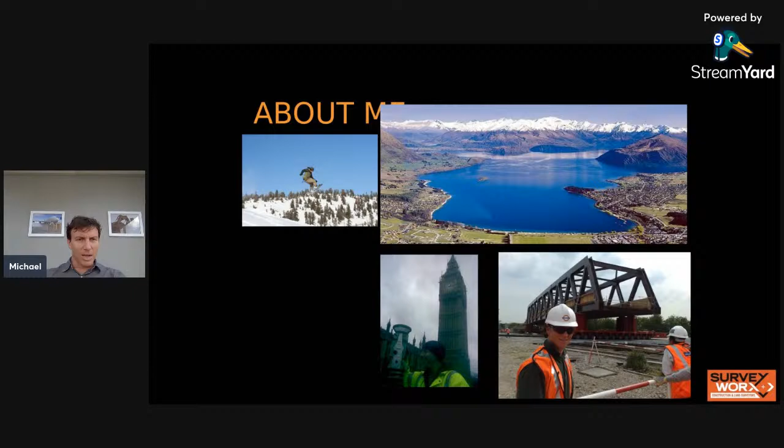So the Waterview Tunnel was the last piece of the puzzle to this Western Ring Route - it used to roll off the tongue.

Excuse me a second. I'll get my notes up to speed.

And so yeah, it was $1.4 billion. The City Rail Link project now overshadows that. 4.4 billion was the last estimate for the City Rail Link. So it seems to be the factor that these projects go up in, about 4 times.

So yeah, at the same time, around the northern end of our project, there was the causeway going on and the St. Luke's widening as well. So all these projects working together to create this new alternative to the Harbour Bridge and State Highway 1.

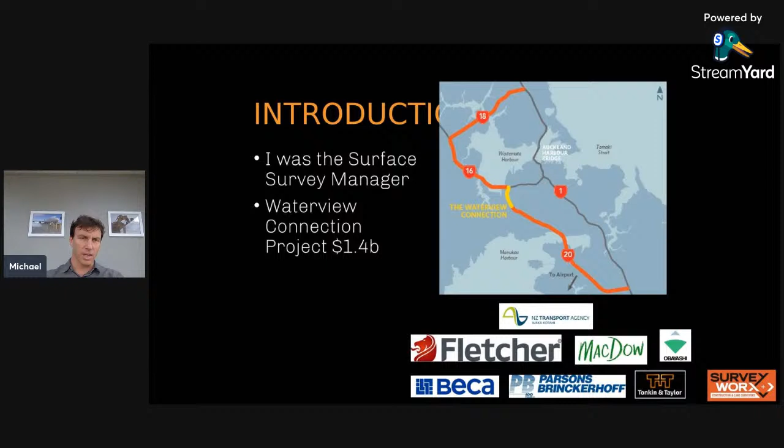So it is 5 kilometres of 6-lane motorway, so 2 tunnels, 2.4 kilometres long, and a 14.4 metre diameter TBM. So that was the 10th largest in the world, the largest in the Southern Hemisphere at the time. Since then, I'm not sure, the City Rail Link doesn't quite have those kind of stats, but 14.4 metres is quite massive.

800,000 cubic metres of spoil came out of both those 2 tunnels, and there's 4 new interchange ramps at the northern end there, and those ramps in themselves were a project each. 55 columns, 48 crossheads, 7 abutments, 260 super T beams. So yeah, rather large.

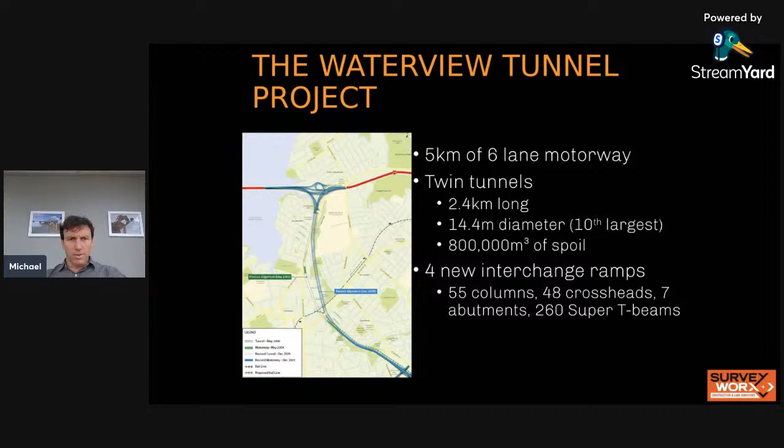So first, I'm just gonna go over the spoil disposal site. Like I say, this is my slideshow from 8 years ago, but I've added this picture to the right. I hope you can make it out. If you look at the top right of the picture on the left, you can see the Auckland Transport Rail Depot building there. If you look on the picture on the right, you can see it in the right corner there too. So the picture on the right is obviously the top down. Picture on the left is a little bit of an oblique view.

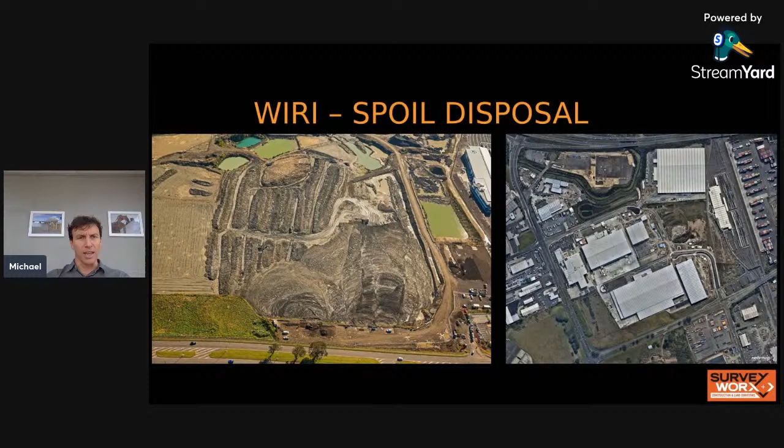So you can see where all the 800,000 cubic metres of spoil went. It was all dumped off at the bottom of the screen there, and you can see it getting pushed out. And what they did was they put it into what they called windrows, to dry out this spoil so it could then be compacted, and that land turned into productive land. So that was Old Wiri Quarry. As you can see there on the left, it's all getting reclaimed with our spoil, and on the right, that is an aerial of today. So good to see that land become productive.

Then there was the precast yard. This is where they made all the segments. Unfortunately, my notes are working quite slowly.

Let's see. I didn't have the number of segments they made, but if you can do the maths, there was 10 segments per ring, and each ring was 2 metres long, and in total there's about 5 kilometres of tunnel. So yeah, a lot of concrete segments. If you look at the road there, you can see a car down there at the bottom left. Kind of gives you a scale, and what's being produced there is only a fraction of the amount of ring segments that was needed to line the 2 Waterview tunnels.

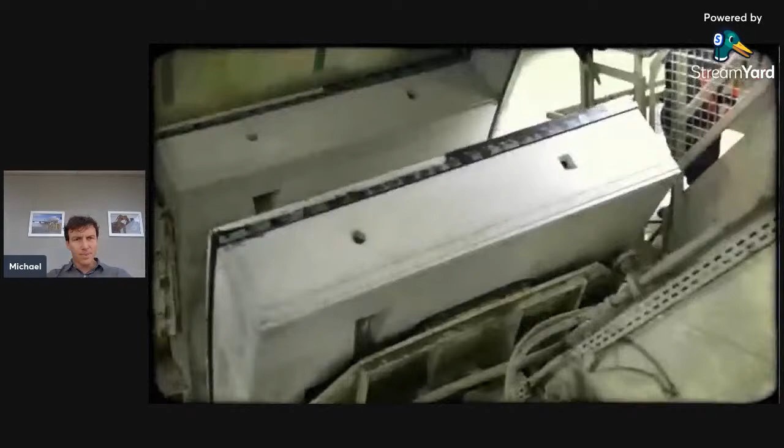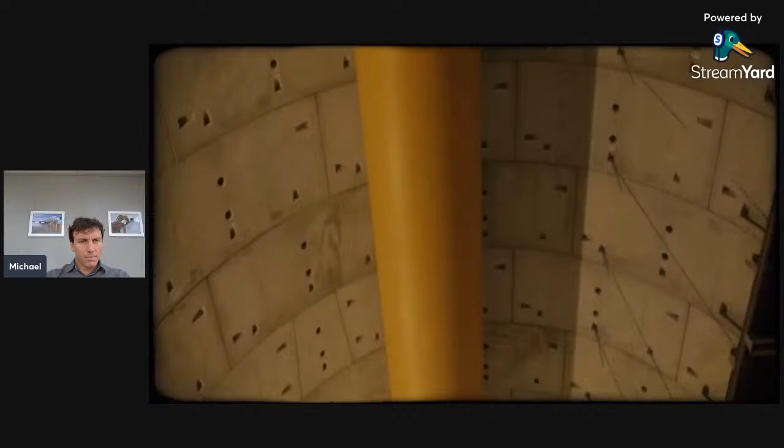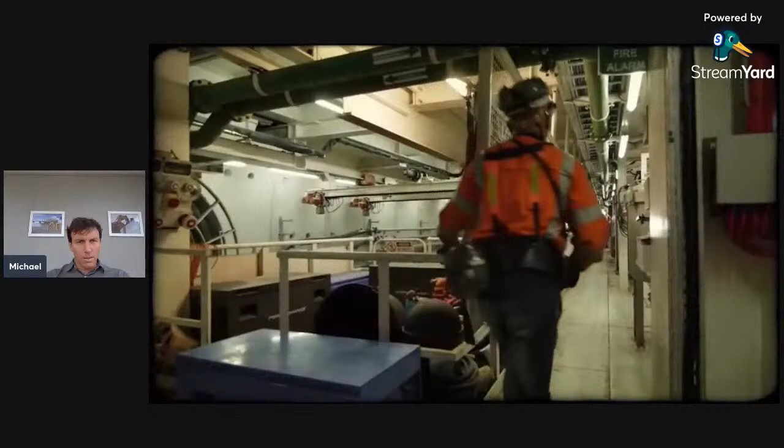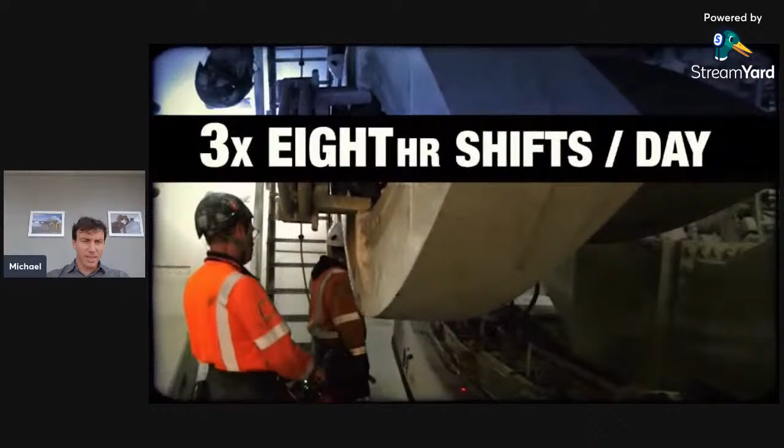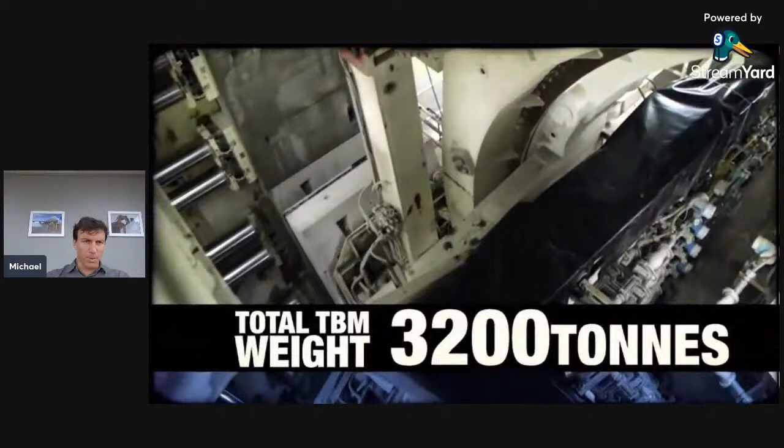This shows you how the tunnel was built. This was the boring machine. So you see there the concrete ring segments getting lifted into place, picked up by suction cups basically, with vacuum. That crane lifts them up and puts them into place. They get put in place on what they call the shield, at the end of the cutting face of the TBM.

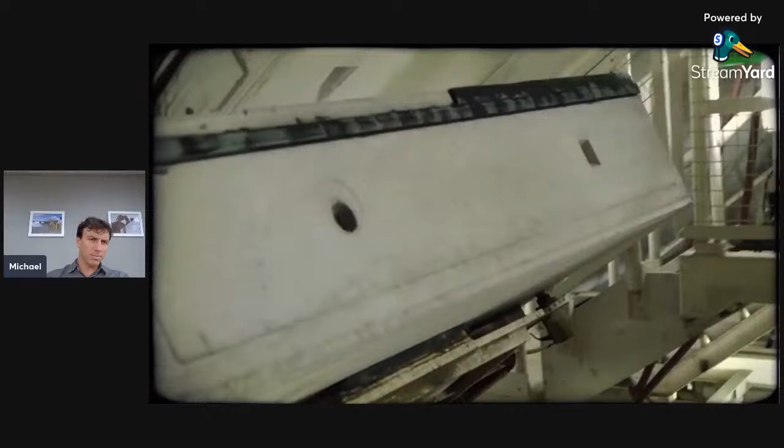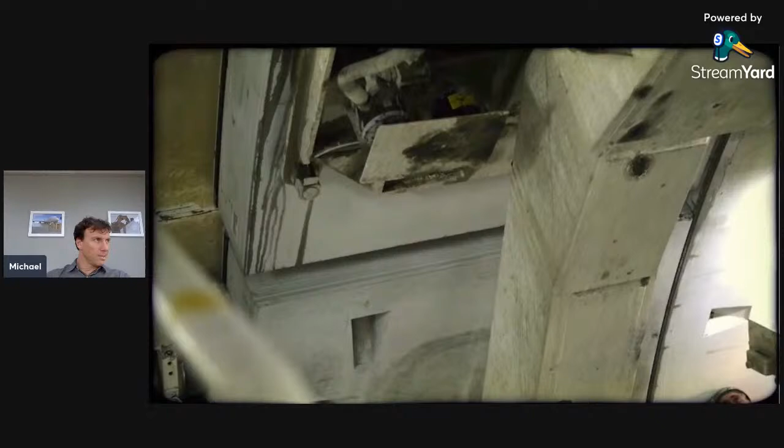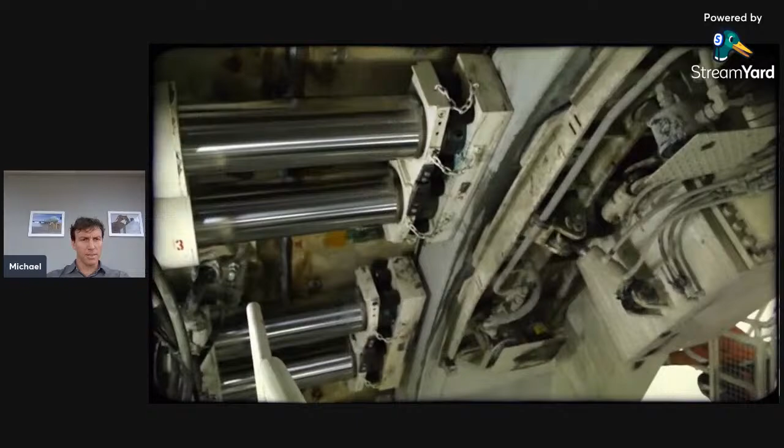That shield moves along, and then those segments go directly onto the ground, to the wall of the tunnel. And then grout is filled in behind, stabilising them. So you see the jacks pushing the segments into place.

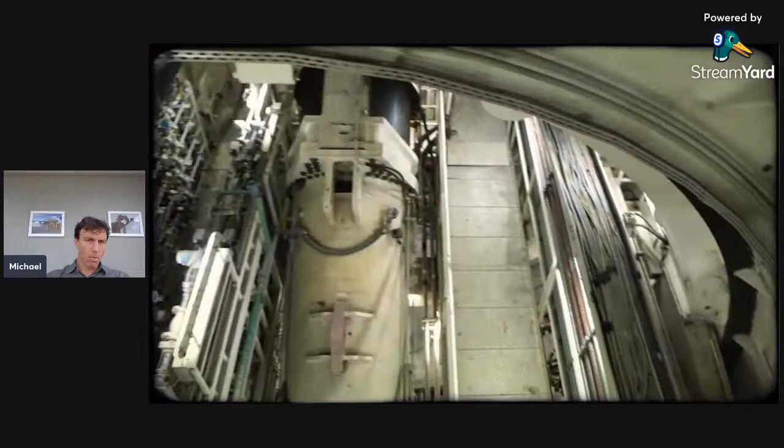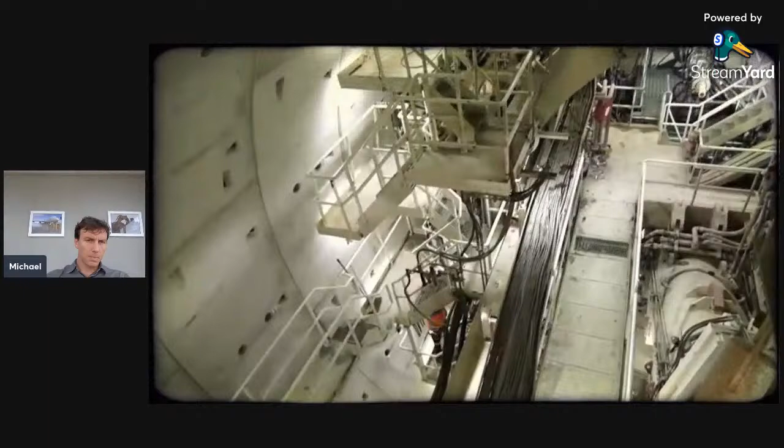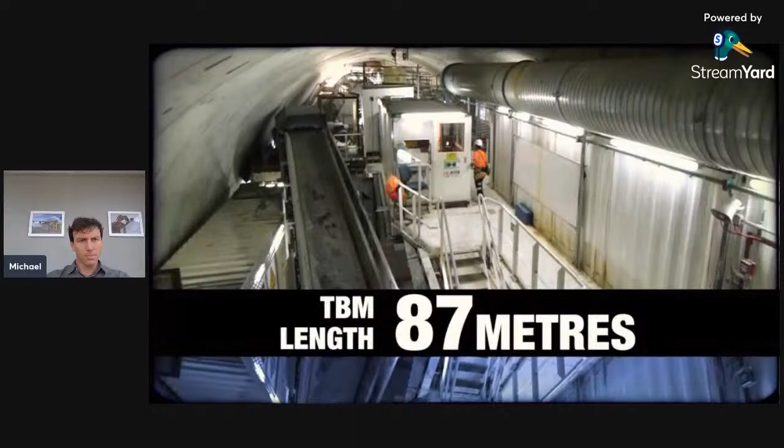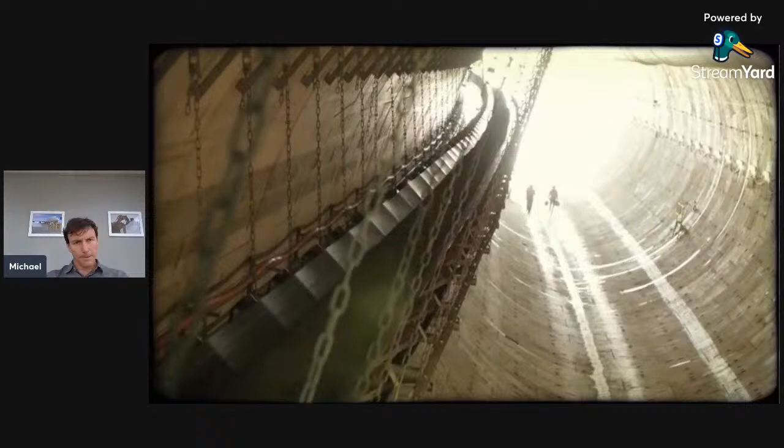That's the spoil going along the conveyor belt, coming out back. That's the driver of the TBM, the big steering wheel, just a bunch of knobs. The air vent, fresh air in.

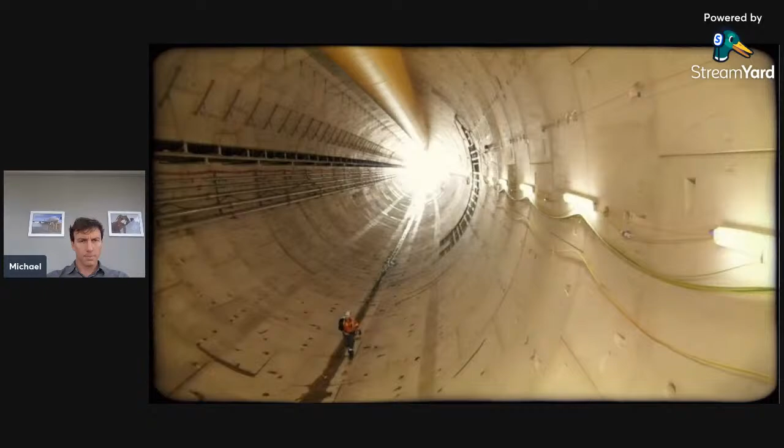So I hope you could hear me over that video. If not, you get the idea. Alice was the name of the tunnel boring machine. There was a competition amongst all the schools to come up with a good name, and some boy from one of the local schools thought of Alice from Alice in Wonderland. And it's tradition to give the tunnel boring machines a girl's name.

I think that's all based off of Santa Barbara, and yeah, if you look that up, you can find out all you need to know about that. But they often have the monument of Santa Barbara at the entrance for the tunnels for good luck and superstition or religious beliefs, depending on your point of view there.

So the surface survey, I was manager of the surface survey team, and there was a north team and a south team and a monitoring team as part of that. And there was also a tunnel survey manager as well. So I didn't have so much to do with the tunnel itself, but overall there were 21 surveyors at its peak, and a lot of that was because there's a lot of shift work, so we needed at least 2 or 3 surveyors per shift, and there were 3 shifts of 8 hours.

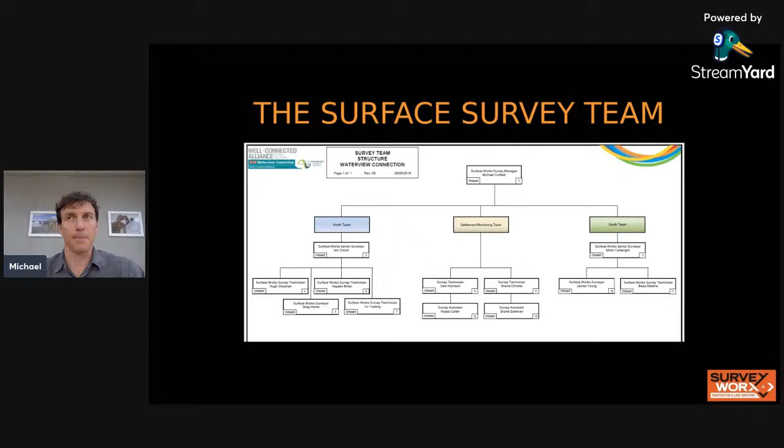So the equipment we used, as you can see the list there, we had quite a few total stations. At that point, the new Faro S120, I think it was called, came into production, and I was pretty keen to get my hands on one. Trimble also got that same thing and called it a TX5. So we were able to use that a fair bit.

We had a bit of machine control on the project, a few diggers hooked up to Trimble machine control systems, and yeah, a lot of GPS units as well, a lot of rovers, as well as all the digital levels to do the monitoring. And we had a bit of a quiver of digital levels. We had a Trimble one for the rainy days. It had the higher IP rating.

And then we had a Sokkia, which we spent a bit of money on, but was literally magic. It could read the barcodes on the staves from literally around corners, and we couldn't quite figure out how it worked. We did so many tests on it, but yeah, it could read the bar code in very strained conditions. Plus, it had the autofocus, so it just sped up everything out of sight.

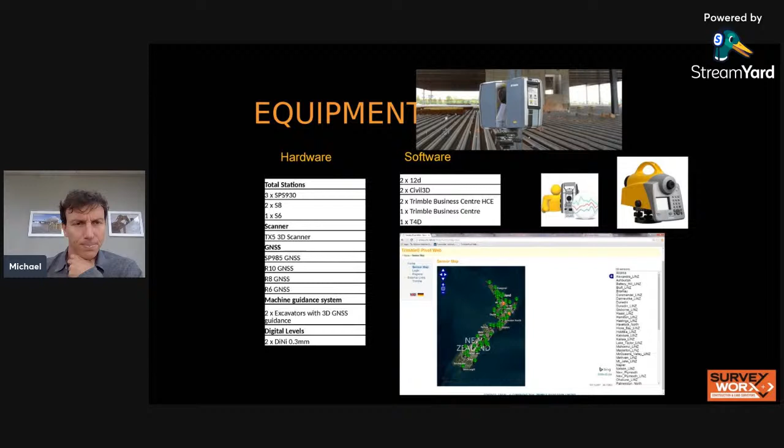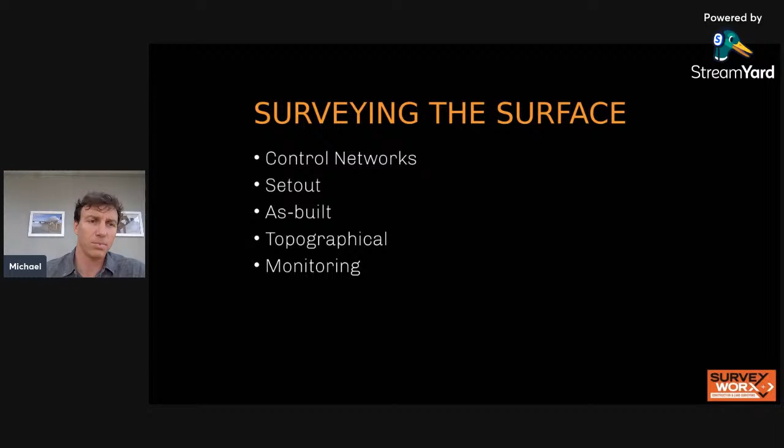So surveying the surface involves setting up a control network, set out, as-built, topo surveys, and monitoring. So I'm just going to go over each of those. So control. On that project, it was a bit of a mix. We got people in to do the control for us at the start.

I learnt a lot about that, and from this project onwards, we made sure we did all our own control, because we had various people from various companies coming in and doing it in various different ways, and we lost all control of the control. So we could put our own control off what they'd provided, but these other people that would come in, we'd sometimes disagree with their methods, and yeah, doing your own survey control is quite important to your satisfaction on the job.

So fast forwarding to City Rail Link, we did it all ourselves, and we kind of over-engineered it, but we were so comfortable and confident on that project, and still are with Sam, who's taken over there. But yes, we used Trimble Business Centre mostly when we were doing our own control on this project.

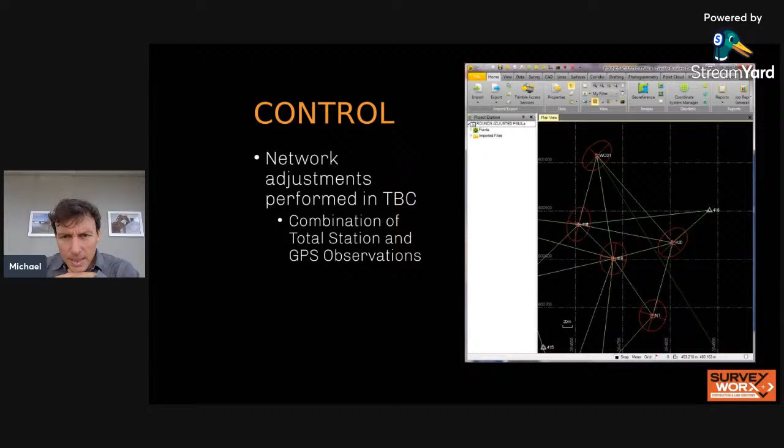So, set out. As mentioned, we had a couple of machine-controlled excavators on site. So that's part of set out, right? Because we have to create these models which can be used by either the total station or the machine control equipment, or the GPS equipment, or maybe even by engineers sitting behind a desk. So to me it all forms part of set out, as part of the data management as well. So in this case, for machine control, we're having to create these 3D models for the excavators to cut to.

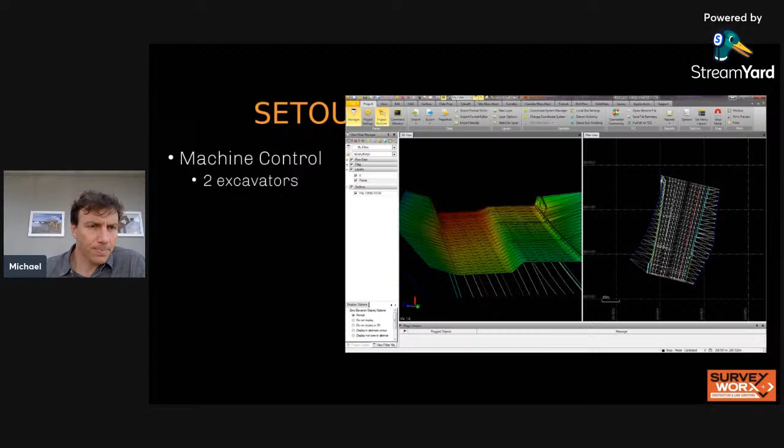So on this particular bridge, this was where we really had to think about our scale factor, because that suspension part there, it's a combination of suspension and column. That suspension part was prefabricated off-site and was 130 meters long from memory. So we had to make sure that those ends were going to fit perfectly to the suspension truss that was going to come along. So we removed the scale factor on that particular part of the project. Otherwise, we left the whole project in Mount Eden 2000.

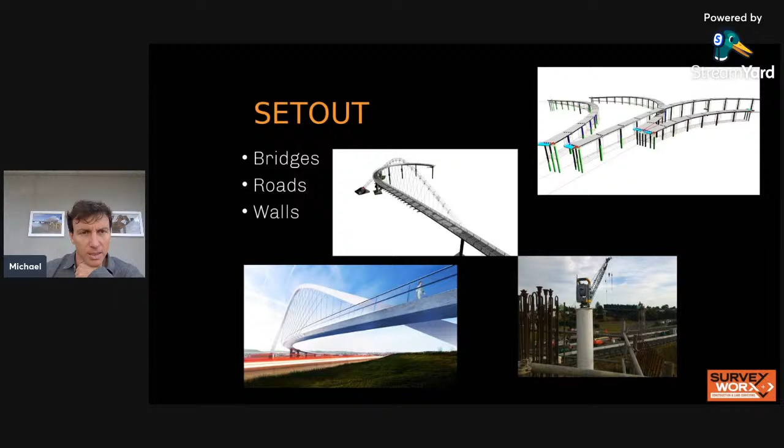But otherwise, you can see the bottom right there. That's a total station setup for doing some of the set out for some of these on-ramps and off-ramps.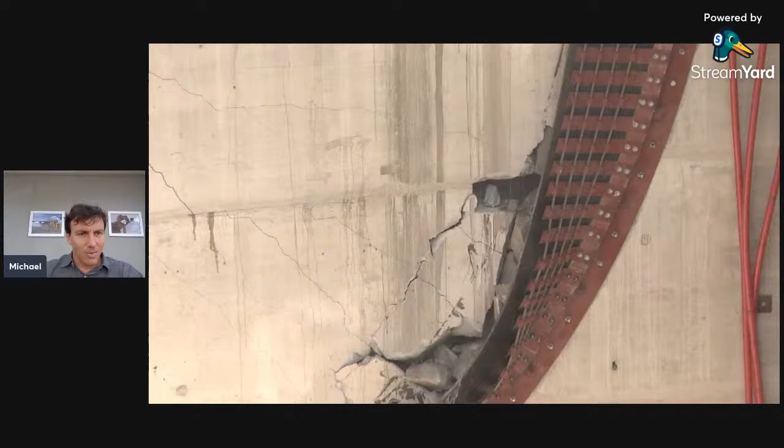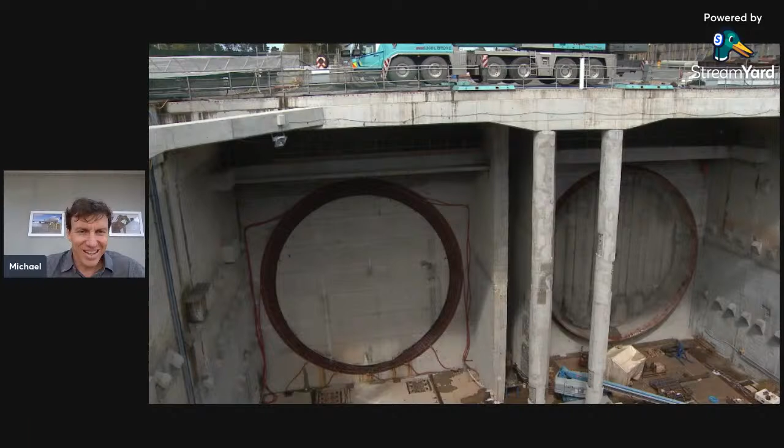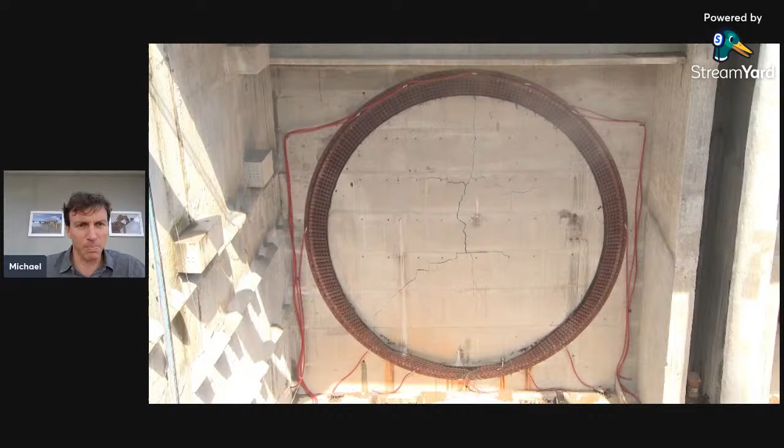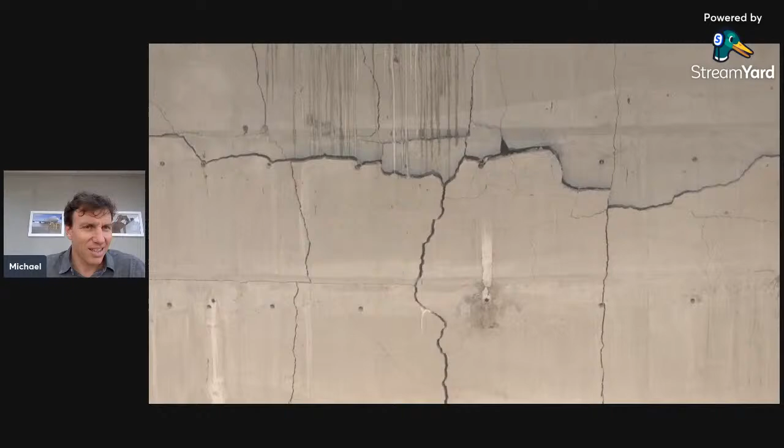Okay. So this is the breakthrough of the TBM. This is a little private one that only a few of us got to see. Politicians got to see the final one, and everyone got to see that. This is the first one. We're all confident but nervous. First big thing like this in New Zealand, and the sound is impressive. It's like a wail. And then you realise it's more like fingernails on a chalkboard. It's metal on concrete. And 14.5 meters of concrete coming down. It was quite a moment.

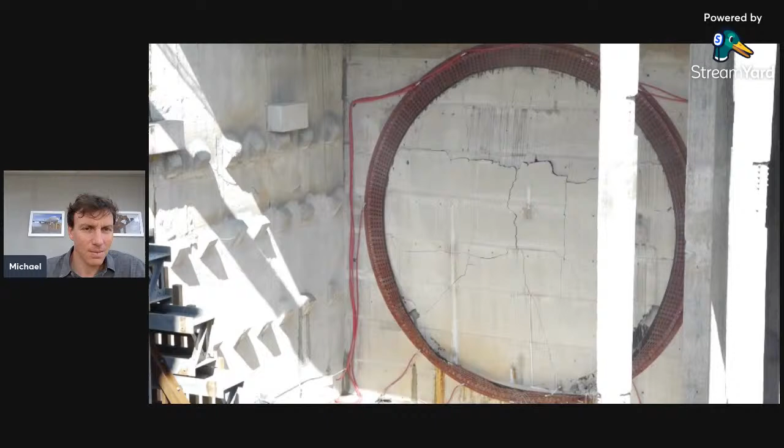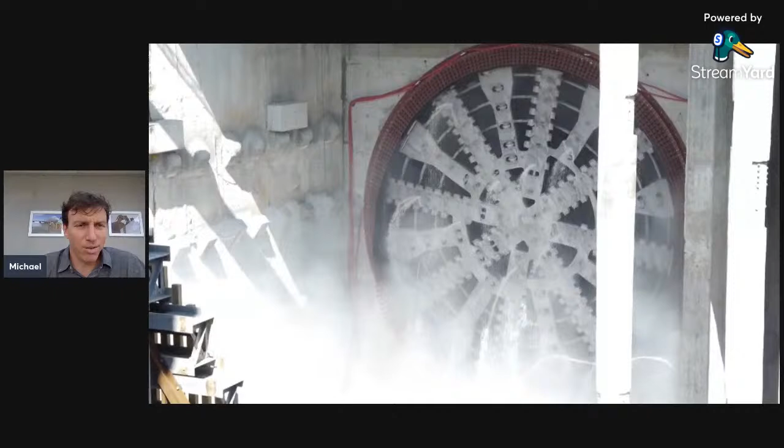I've seen a few other videos of breakthroughs, and I have to say that this one seems the more spectacular. They all come through in different ways depending on what kind of concrete they put in. But for our one, there was no reinforcing at all, so it all just came together.

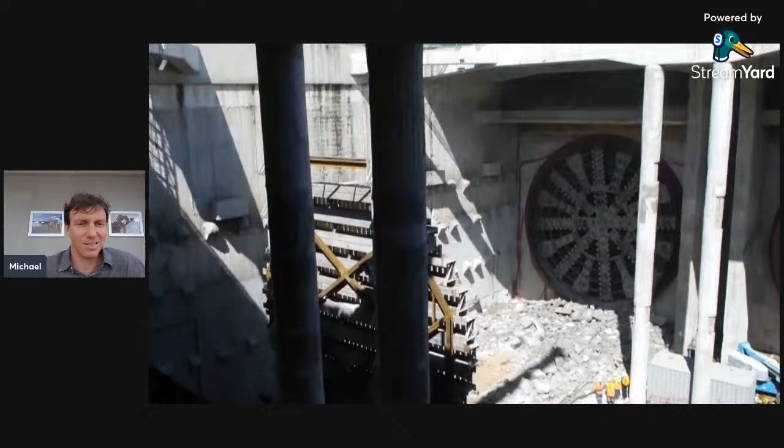So yes, a very, very impressive breakthrough. Made a lot of noise. It's very exciting. Definitely a highlight moment of my whole career.

And yeah, I've got that under the heading of set out because, as you can imagine, if that's not coming out in the right place, then there's no going back on that. You've got to make sure your set out of that tunnel boring machine is on the money the whole way. And even though we've got our methods of bracing the traverse as we go up, it's still effectively a hanging traverse. So yeah, very, very good work of the survey team there to get that through within 10 mils, they said.

Other forms of set out. So we set out the skate park. They did a new skate park. We also scanned a BMX track and set that out. So we scanned a BMX track from somewhere else in the city and basically copied and pasted it.

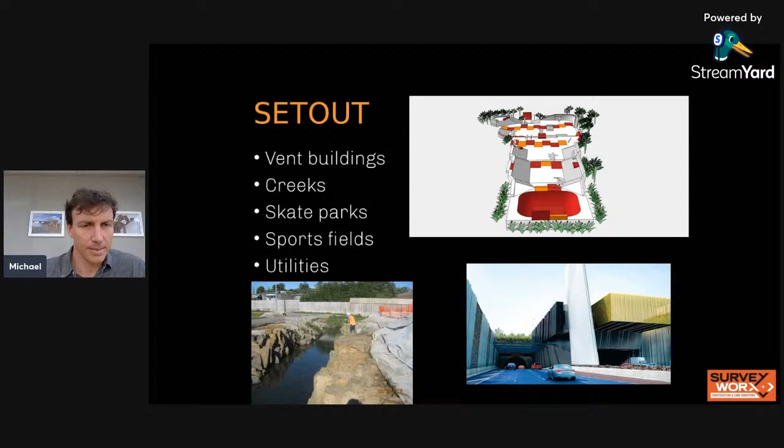And then there's the topographical. We inherited pretty much all the topographical information. So it was one of our challenges, especially as the design team are using it. All the work of other surveyors suddenly becomes our responsibility, and anything that's not right gets put on us to fix, or to explain why it's not like how it is now.

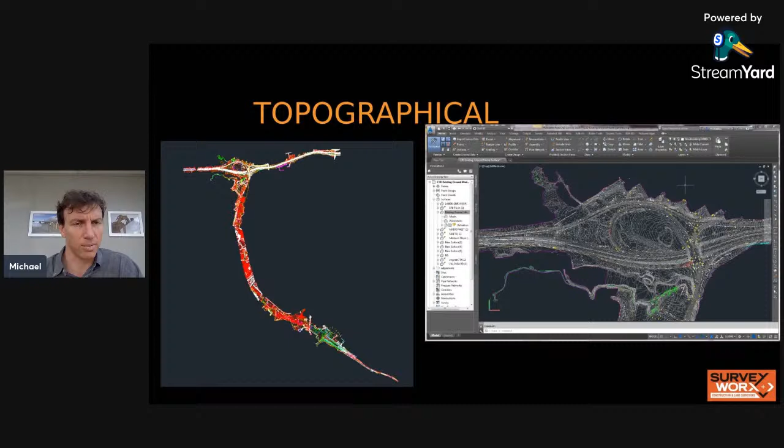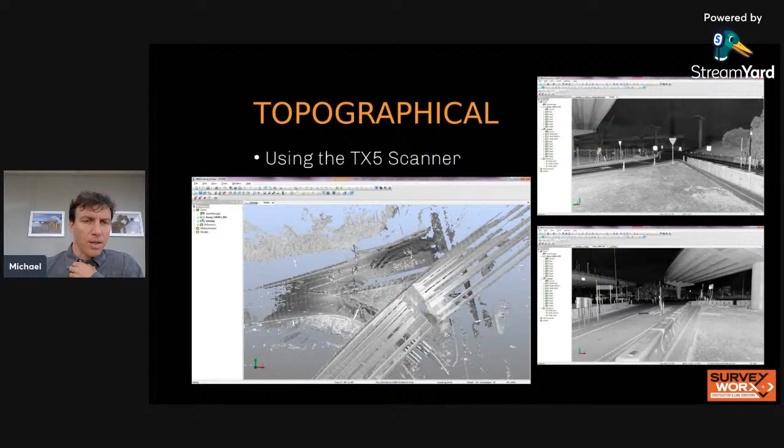So yeah, these topo surveys again were done by many different firms. So we had to paste it all together and take ownership there and put it into one single model in Civil 3D. But we also used our scanner to go and fill in some gaps, get the underside of the trusses as they went up, the Super T beams, but also a great tool for getting the busy roads.

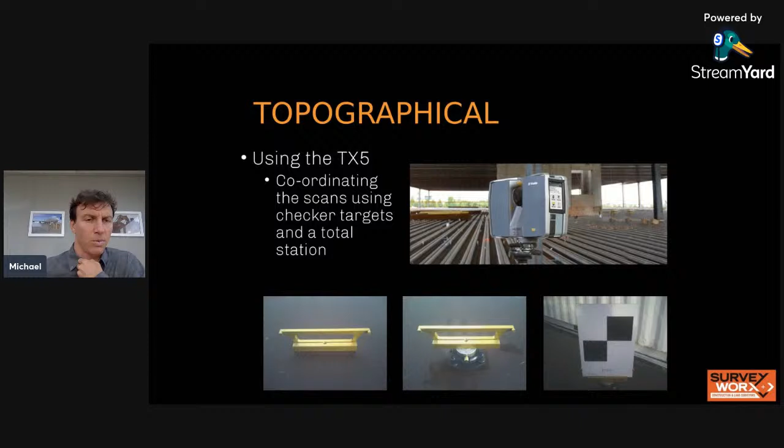So I was quite proud of our little system we made for holding a checkerboard, a checker target, so that we could put the scanner in the place of the checker target on the same tripod and tribrach, and it'd be centered, and you can get the total station to measure to that. So all these points were nicely coordinated.

And then we had to do a lot of as-building as structures were completed. It's always part of the handover to show that the whole project is built where it was meant to be built. But always on these projects, it's very critical for the underground services. So we had a bit of a system here: whenever a service was completed, an engineer would log a job, and then that job would link to that data. So it was available for anyone to see at any time.

In City Rail Link, I expanded on this a lot further, and we had this linked to the data as well. So the as-built data was basically live, and all the surveyors knew the format and the accuracy and everything that was required of their pickup on site, so that it could be quickly transferred into the system. So when I say live, there's always processing, but the guarantee was that there was no data more than a week old, which was important for all the decision makers, especially in a busy street like Aotea. But yeah, that was City Rail Link, and Waterview had a lot less services, so not so much problem there.

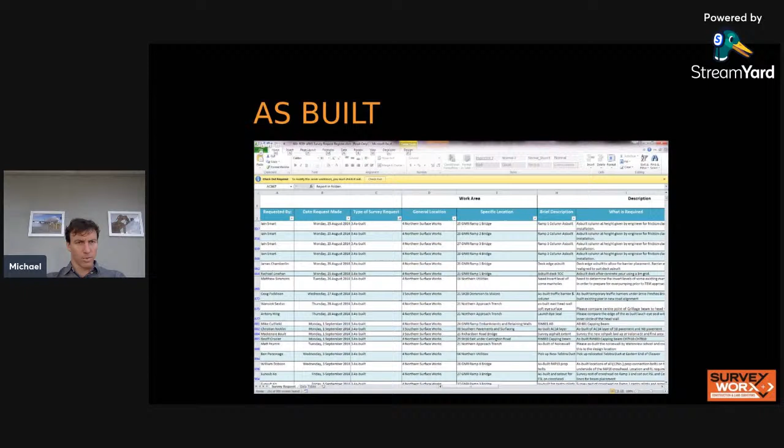Monitoring was a big part of this project. For consent monitoring, 144 marks per week. Those were weekly marks, and this changed regularly as well, but this was a snapshot in time. And we had another bunch of marks that were 245 per month, using the digital level and processed in Trimble Business Centre.

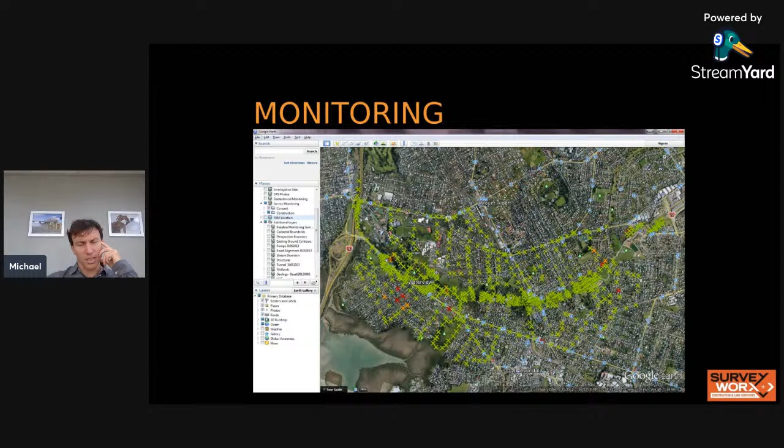And as you can see, they went quite a far way out past the extent of the project. So yeah, a lot of work for our monitoring teams there. That was all done with digital level, like I've said.

Monitoring for construction, so a bit different to monitoring for consent. Monitoring for construction is where we really think there might be something going to happen. The structural engineers want to know that their structures are holding what they predict it will hold.

So one of the key components was when we crossed underneath the KiwiRail line at the back of Pak'nSave. So this is where we first started investigating our real-time monitoring as it first went under here. Actually, no, we had the real-time monitoring set up as we first set off, but this was a good use of it as well. So we had live information of any movement on the tracks as we installed prisms along the tracks, and had a total station there set up 24/7 with a guard and just continuously measuring.

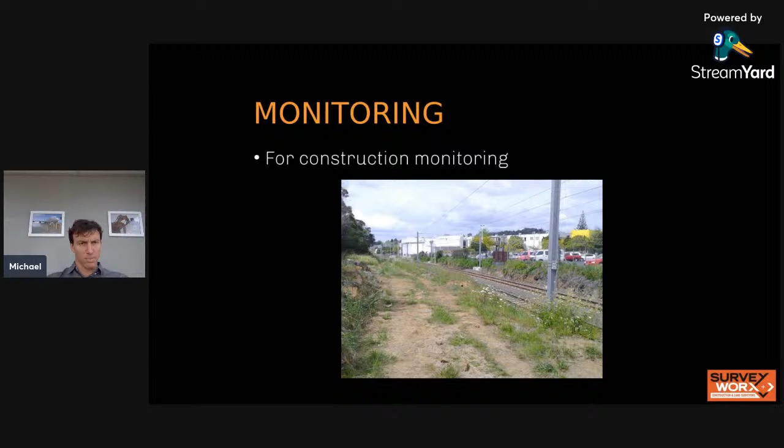The structural engineers had allowed for 80 millimeters of movement of those walls, and they wanted to monitor as soon as the wall was exposed, but as you can imagine, it's very dirty. There's an excavator there working against those walls, so any prisms you put in there, or even any sticky targets or anything, is either going to get covered in mud or knocked off by the excavator.

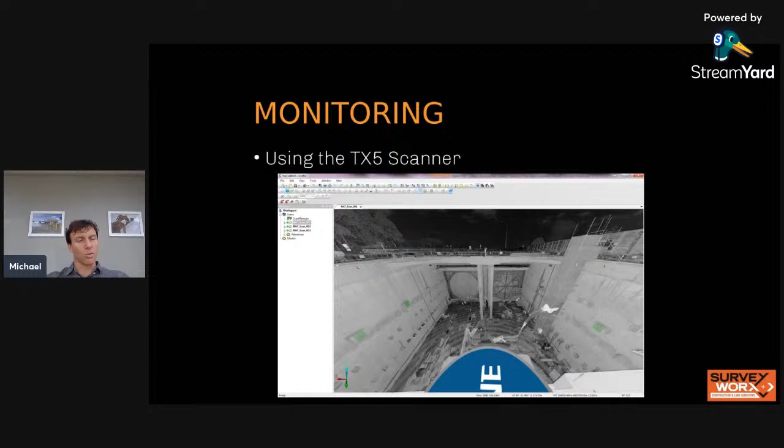So the scanner was a good option here, and it was agreed all they needed to see was convergence. So absolute position and height change was not so important. They just wanted to know if the wall was coming in or not. So the scanner was a good tool in this case.

And then you've got the real-time monitoring area. So this area is on Great North Road. Great North Road is considered the busiest local road in the country. I think they said it was 20,000 cars per day. So we had to make sure that that road was not going to move as the tunnel boring machine went underneath it. So again, using the real-time monitoring setup, using Trimble and T4D as part of Trimble to give live information on any ground movement.

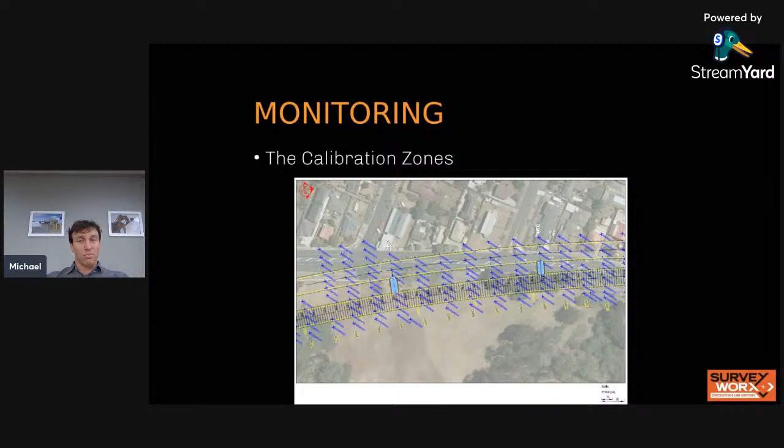So yeah, it was quite stressful at the start as it really came to the crunch, and throughout as the TBM moved through this zone. But it was really effective, and if you can see here, we came up with a few little ideas on how to do this effectively.

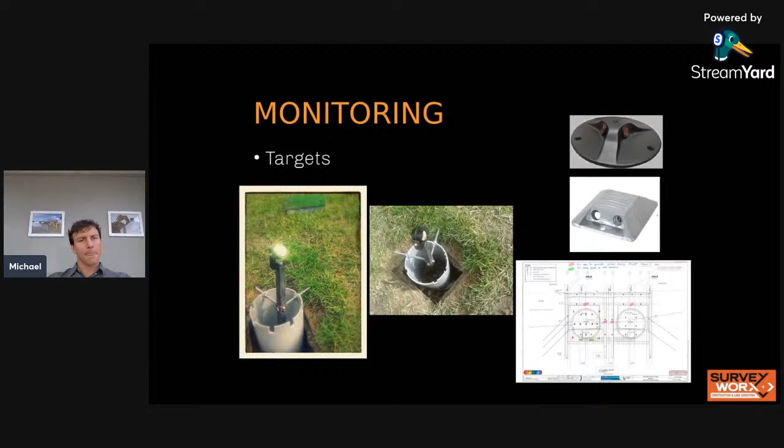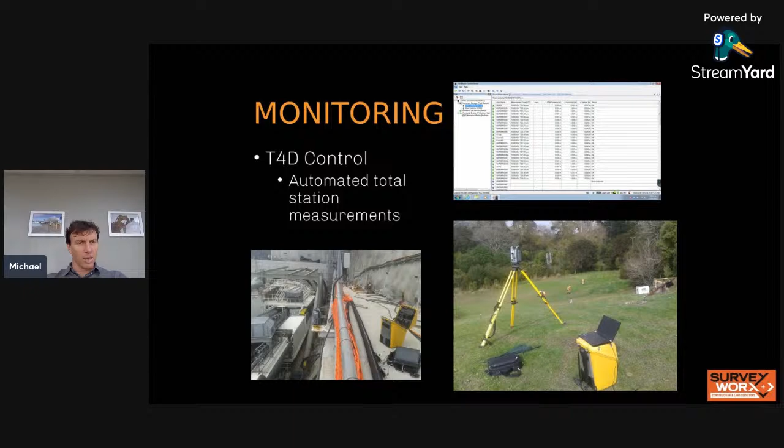So yeah, still more on the T4D control. So as you can see there, the total station setup being powered by a laptop. Top image there is from the control panel of T4D. And in this bottom left image, you've got to try and do Where's Wally and spot the grey total station in a world of concrete. But it's there on a little platform we'd made for it, cantilevered out to the side so that it can measure as much of the head wall as we could see from that point.

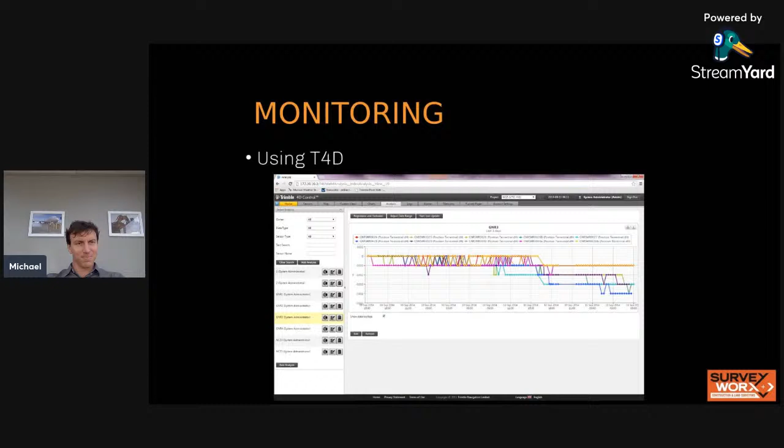Anyway, I've kind of blasted through that. That's my career highlight, and it's my highlight because I was involved in pretty much all parts of the project, and I was able to bring a lot of innovation. It's where I first became survey manager as well, and all the drama surrounding that. Yeah, it was a great time in my career. Eight years ago seems like last year, but so many learnings from it, and such a great project.

So I'll leave it open to you guys to ask any questions. Otherwise, I'll hand back to Jayne.

Thank you, Mike, that's amazing, really, really exciting. I've really enjoyed that, and I hope everyone listening in, including on the library now, really enjoyed hearing it from Mike. Mike, there aren't any formal questions that have come through yet, but I'd like to say to those listening in right now, please feel free to type some questions in—we've got a bit of time. I've got a few questions, Mike, I've taken quite a few notes here, and I'm sure everyone would be inspired to hear.

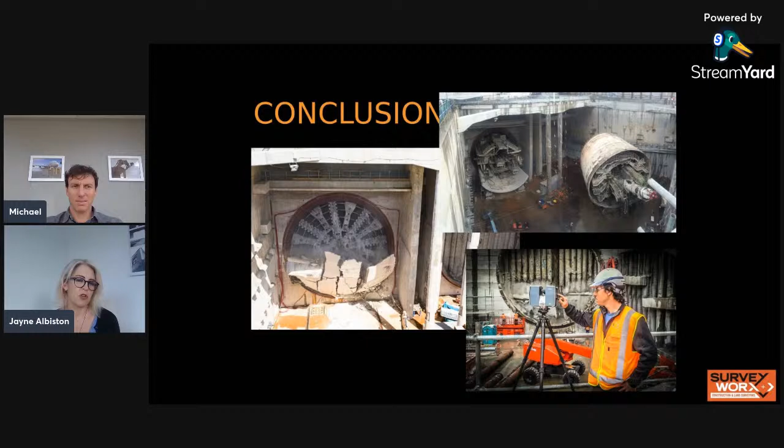Okay, expanding on the first question—what got me hooked. Well, it was long before that, but the set out of complex structures, you go through survey school and there's a lot of talk about pegs and boundaries, and you think, yeah, that's quite cool, you're creating value from land by putting in pegs and changing the land. But with these kinds of projects, instead of a wooden peg, you're putting in a little concrete nail drilled into a bit of blinding concrete, and then you go away and come back a few days later to do the next stage, and your nail has turned into a big concrete abutment. You think, that's pretty cool.

Then you go into the next part where you mark out for the Super T beams, line it all up, put some marks down, go away and come back next time, and all these Super T beams have gone in right on top of your marks. Then you mark out these walls, put a lot of effort into getting the accuracy and enough nails on the ground, and you have a good team working with you that puts in the wall panels. You come along afterwards and see it—perfect, along the line, perfect curves or perfectly straight lines—and you think, wow, that's cool.